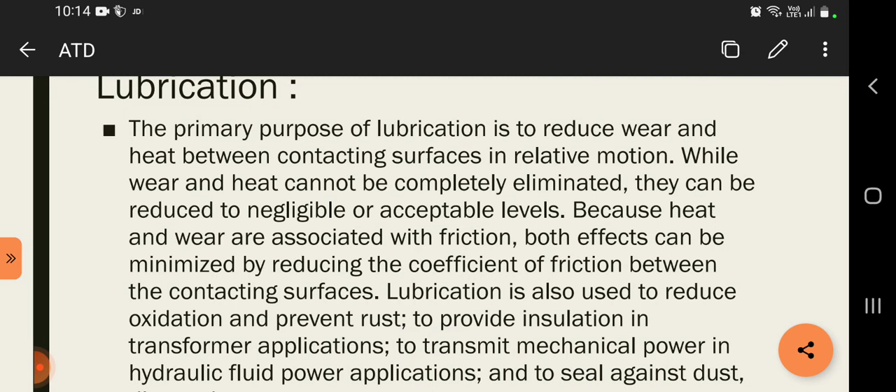Lubrication. The primary purpose of lubrication is to reduce wear and heat between contacting surfaces in relative motion. While wear and heat cannot be completely eliminated, they can be reduced to negligible or acceptable levels. Because heat and wear are associated with friction, both effects can be minimized by reducing the coefficient of friction between the contacting surfaces.

Lubrication is also used to reduce oxidation and prevent rust, to provide insulation in transformer applications, to transmit mechanical power in hydraulic fluid power applications, and to seal against dirt and water.

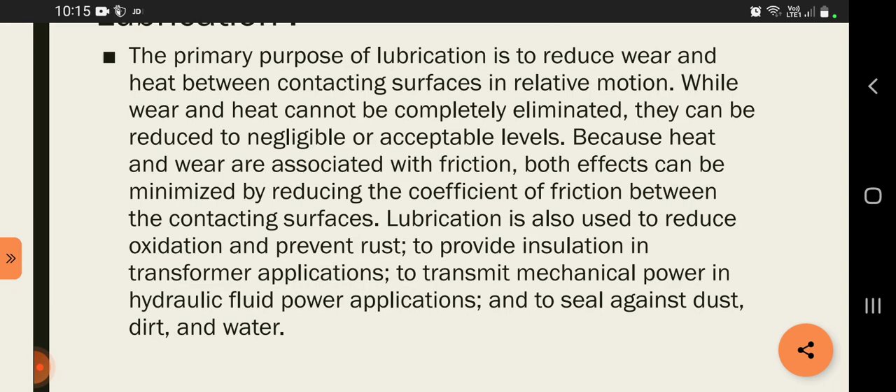The lubrication regimes. The modern period of lubrication began with the work of Osborne Reynolds, 1842 to 1912. Reynolds' research was concerned with shafts rotating in bearings and cases. When a lubricant was applied to the shaft, Reynolds found that a rotating shaft pulled a converging wedge of lubricant between the shaft and the bearing. He also noted that as the shaft gained velocity, the fluid flowed between the two surfaces at a greater rate.

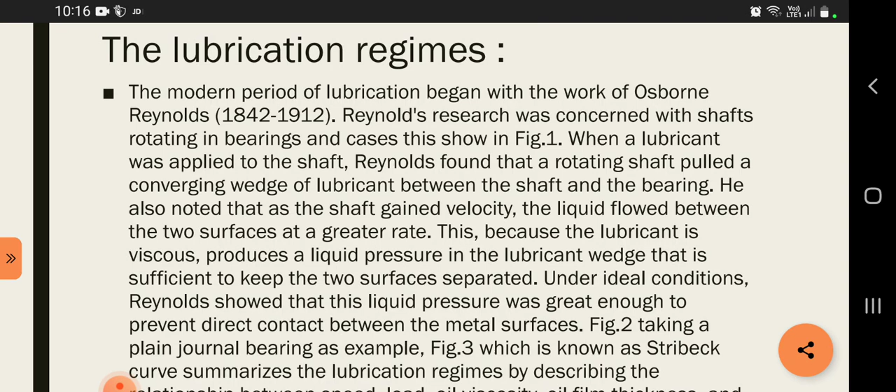This is because the lubricant is viscous and produces a liquid pressure in the lubricant wedge that is sufficient to keep the two surfaces separated. Under ideal conditions, Reynolds showed that this liquid pressure was great enough to prevent direct contact between the metal surfaces. Taking a plain journal bearing, what is known as a Stribeck curve summarizes the lubrication regimes by describing the relationship between speed, load, oil viscosity, oil film thickness, and friction.

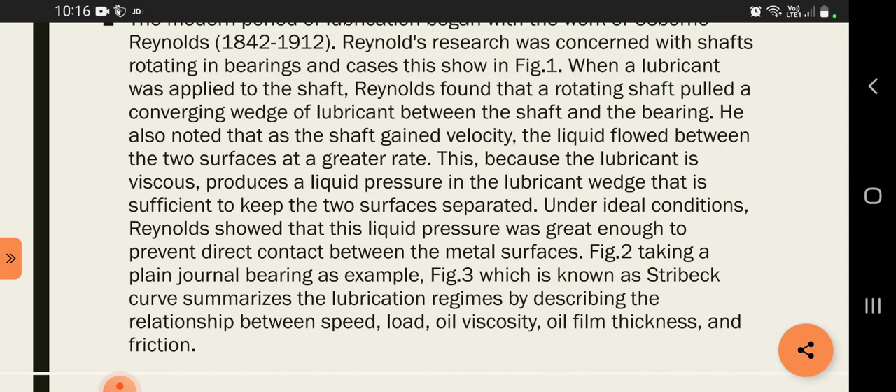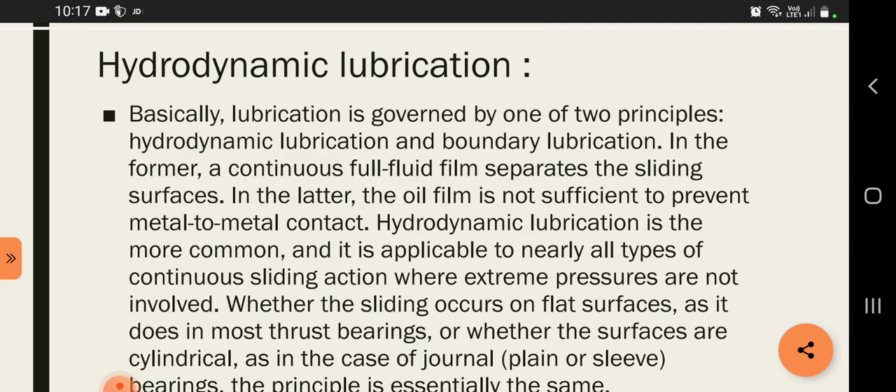Hydrodynamic lubrication. Basically, lubrication is governed by one of two principles: hydrodynamic lubrication and boundary lubrication. In the former, a continuous full fluid film separates the sliding surfaces. In the latter, the oil film is not sufficient to prevent metal to metal contact.

Hydrodynamic lubrication is the more common and it is applicable to nearly all types of continuous sliding action where extreme pressures are not involved. Whether the sliding occurs on flat surfaces, as it does in most thrust bearings, or whether the surfaces are cylindrical, as in the case of journal or sleeve bearings, the principle is essentially the same.

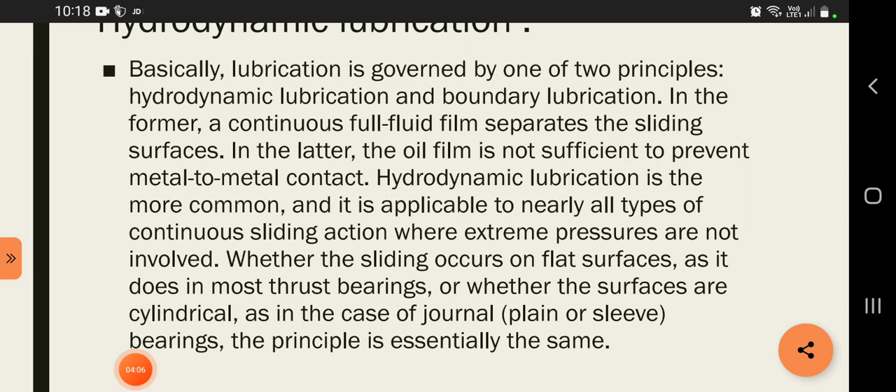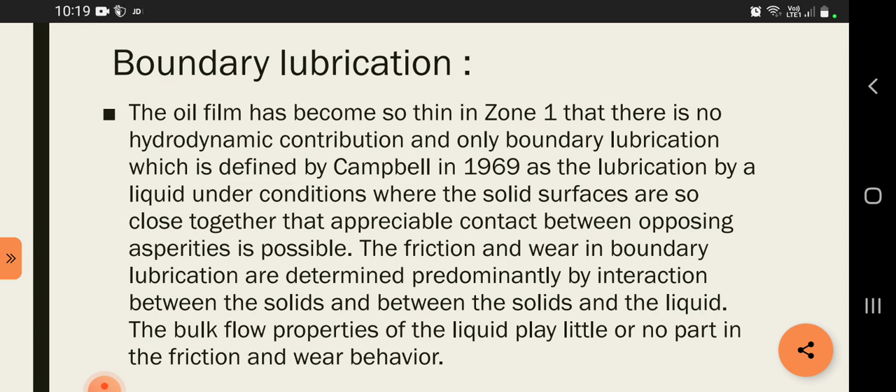The friction and wear in boundary lubrication are determined predominantly by interaction between the solids and the liquids. The bulk flow properties of the liquid play little or no part in the friction and wear behavior.

General classification of lubricating oils. The term lubricating oil is generally used to include all those classes of lubricating materials that are applied as fluids. Lubricating oils are made up from the more viscous portion of crude oil which remains after removal by distillation of the gas oil and lighter fractions.

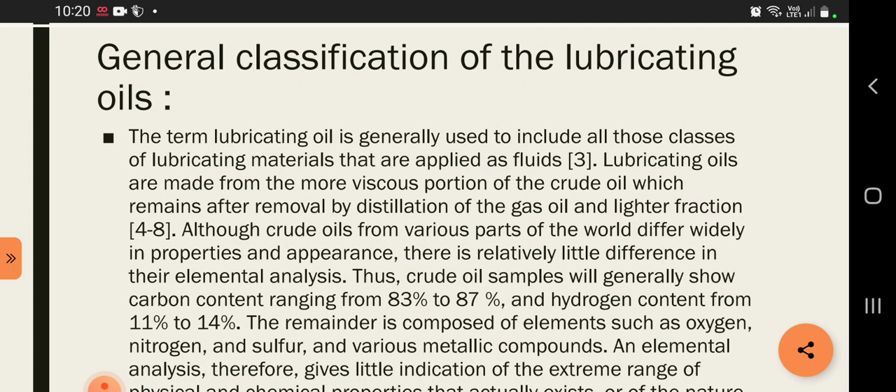Although crude oils from various parts of the world differ widely in properties and appearance, there is relatively little difference in their elemental analysis. Thus, crude oil samples will generally show carbon content ranging from 83% to 87%, and hydrogen content from 11% to 14%. The remainder is composed of elements such as oxygen, nitrogen, sulfur, and various metallic compounds.

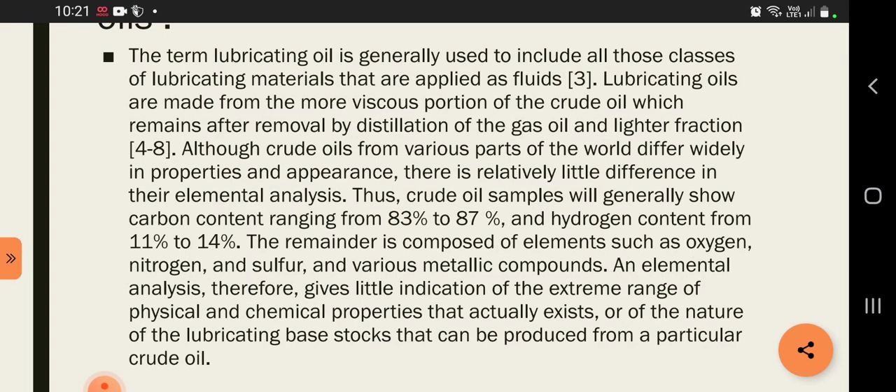An elemental analysis therefore gives little indication of the extreme range of physical and chemical properties that actually exist, or the nature of lubricating base stocks that can be produced from a particular crude oil.

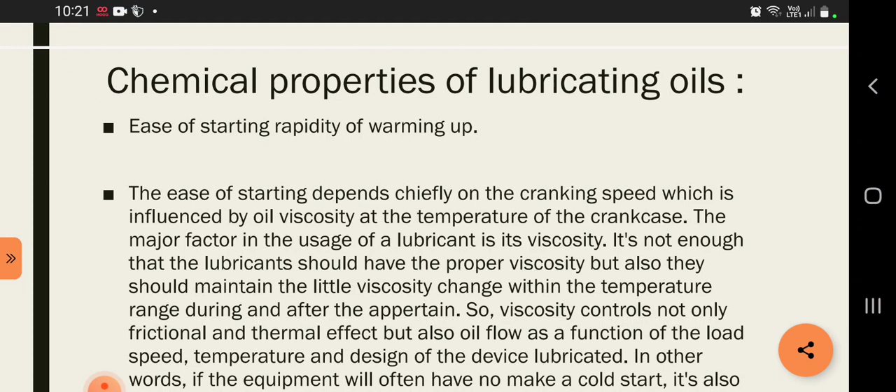Chemical properties of lubricating oil: ease of starting, rapidity of warming up. The ease of starting depends chiefly on the cranking speed, which is influenced by oil viscosity at the temperature of the crankcase. The major factor in the usage of a lubricant is viscosity. It is not enough that lubricants should have the proper viscosity, but also they should show little viscosity change within the temperature range during and after operation.

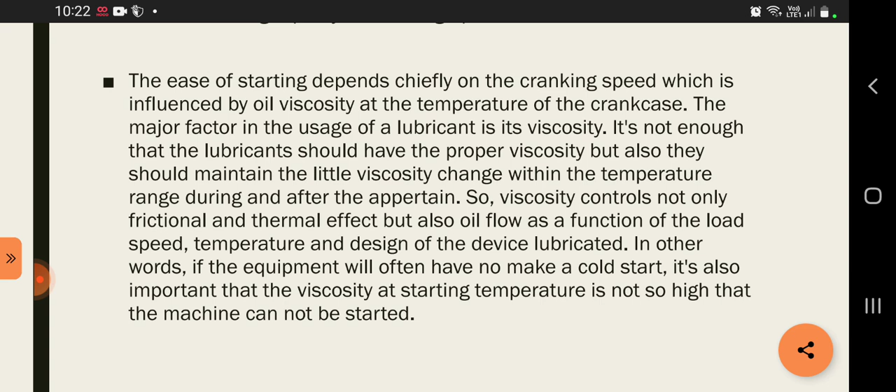So viscosity controls not only the frictional and thermal effects but also oil flow as a function of the load, speed, temperature, and design of devices lubricated. In other words, if the equipment will often have to make a cold start, it's also important that viscosity at starting temperature is not so high that the machine cannot be started.

Low carbon forming tendency. This property is important to high compression ratio petrol engines, where carbon deposits will adversely affect combustion quality. The extent and also the composition of such formed deposits cause noisy and rough burning, which subjects the engine to high thermal and mechanical stresses, resulting in lowering of performance and reduction of engine life.

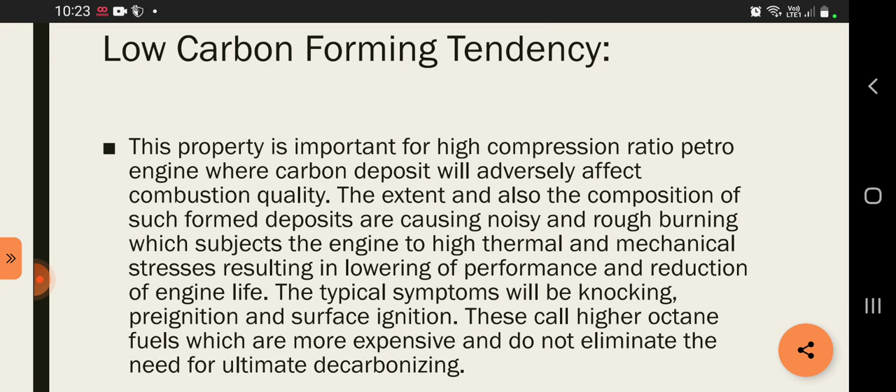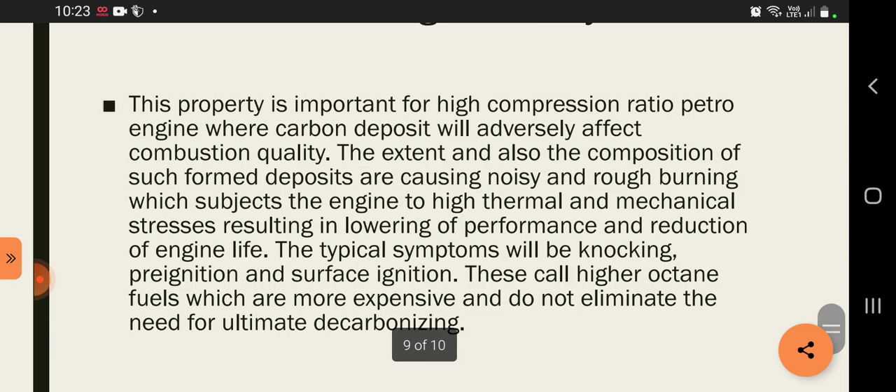The typical symptoms will be knocking, preignition, and surface ignition. These call for higher octane fuels, which are more expensive and do not eliminate the need for ultimate decarbonizing.